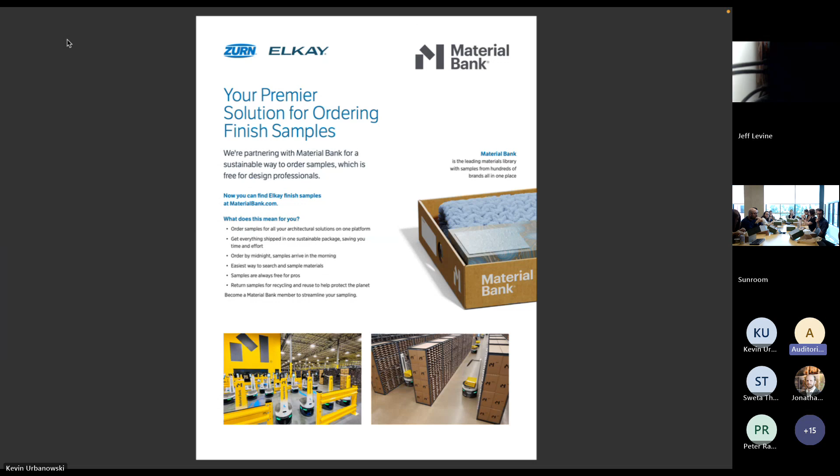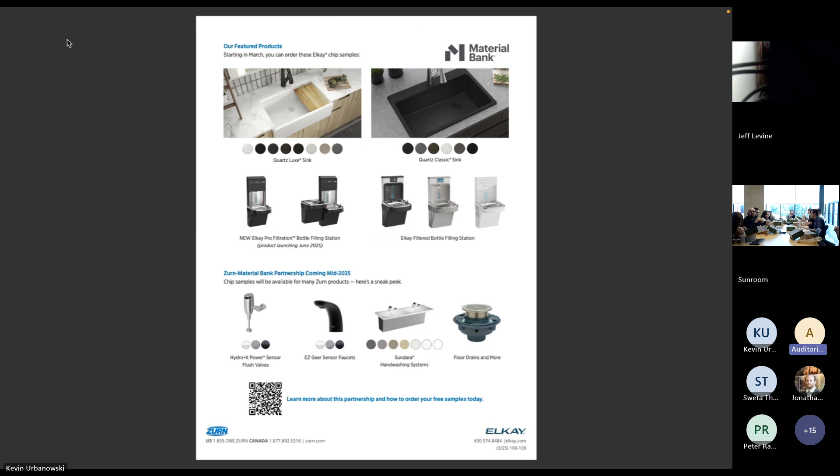And then the other thing, as far as housekeeping stuff goes, Material Bank. We partner with Material Bank on the Zurn Elkay side for samples. Are you guys using Material Bank at all? Familiar with it at all? Okay, so some yeses and some no's. Yeah, so they handle all our samples right now. So you could just log on their website, and if you guys need samples for anything, just pick your sample, and they can actually get it to you overnight. So yeah, it's a good resource to utilize. And then when you're done with the samples, you don't have to keep them around taking up space. You just send them back, and it's all free of charge for you guys to use the service. So again, I'll send all this in a follow up.

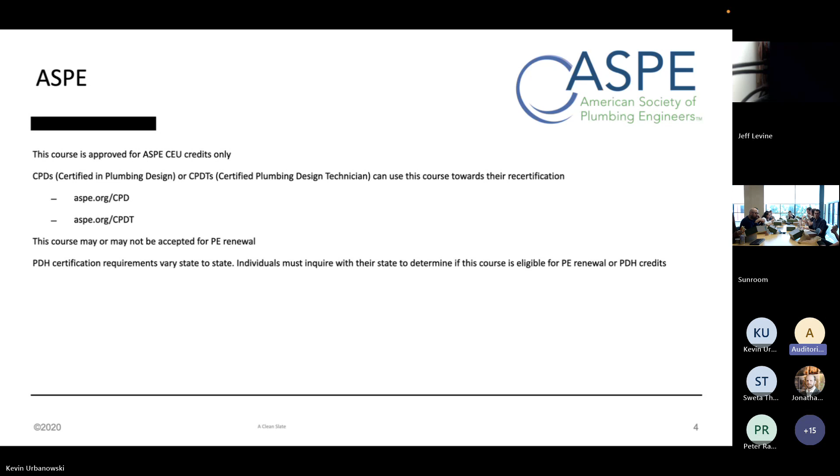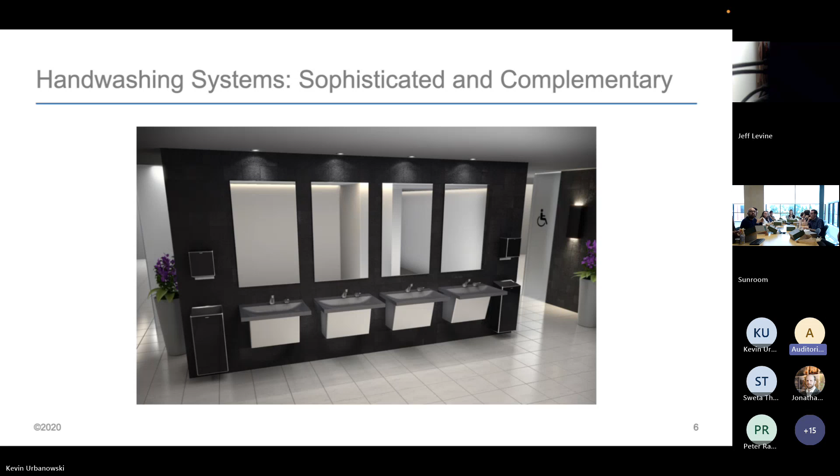So really this presentation is going to focus on what we've seen in the market as far as public restroom design, what kind of products we're seeing more widely used and spec'd. We'll go into how these products have changed over time and things like that. First being hand washing systems. A lot of manufacturers are focusing on these all-in-ones. Basically, you pick your basin style. Generally, they'll have like 6 to 7 different ones to choose from. You'll pick your faucet and your soap dispenser, and it's kind of like an all-in-one for you guys. Very easy to spec, and very easy for the contractor to install as well. So that's what we're seeing the industry going for in certain applications.

So we'll talk about the hand washing systems a little bit. We did a big study in Zurn Elkay, and a couple of things that we found is people really prefer their own space in the restroom. 30-inch sinks are kind of the standard now as far as the minimum goes. And then an alarming result. I really don't like to say this stat when people are eating lunch, but generally what we found during the study is only around 30% of men wash their hands after using the restroom, and 60% of women. So women are much better, but I think we all have some work to do.

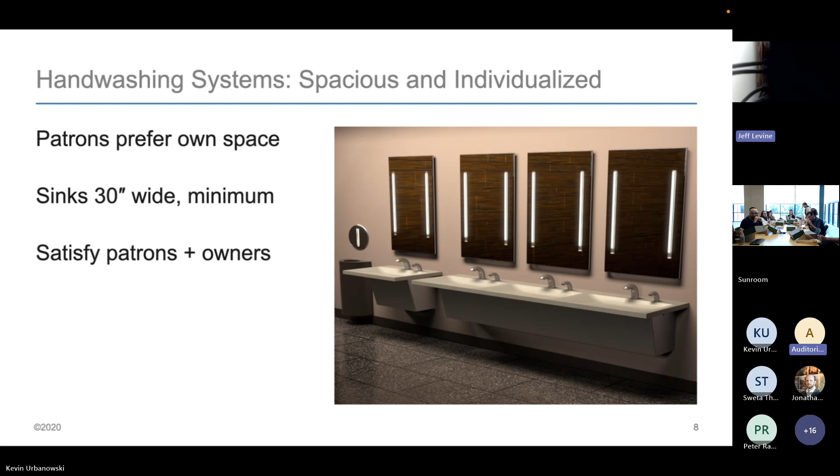They also did a follow-up: what would increase that score? And believe it or not, the nicer the restroom looked and the more sanitary the hand washing area was, the more apt people were to wash their hands. I know it's mind blowing, right? That something looks nice, we'll use it to wash our hands. But that was the takeaway from that. So thus, manufacturers started focusing on the aesthetic of the commercial side more so.

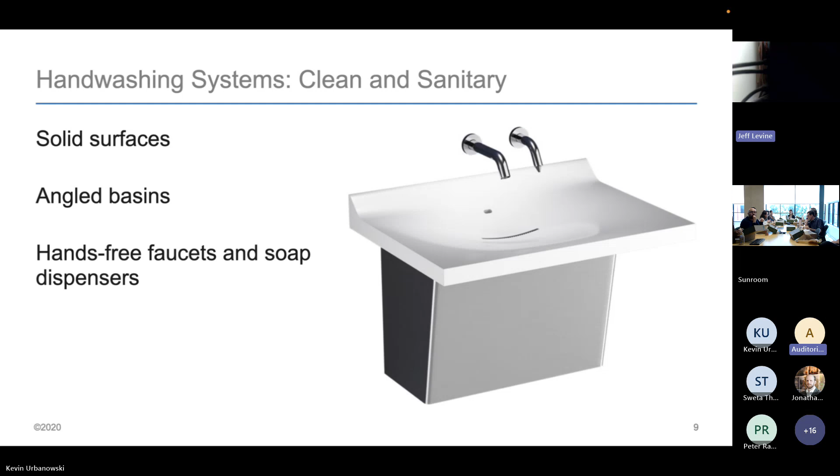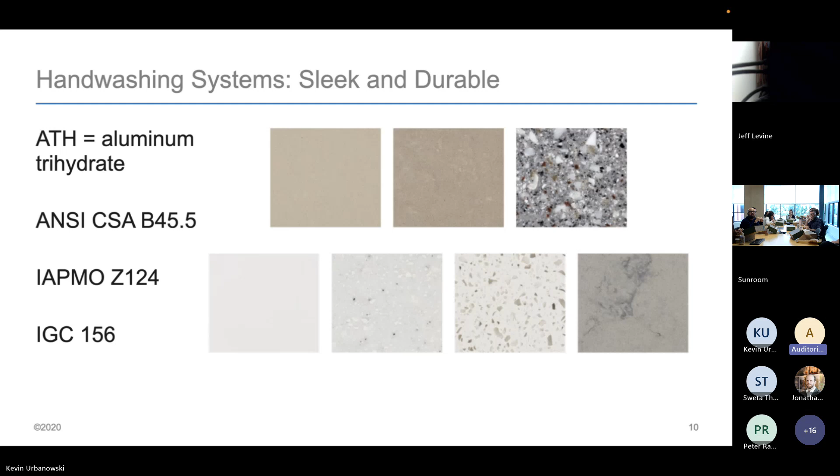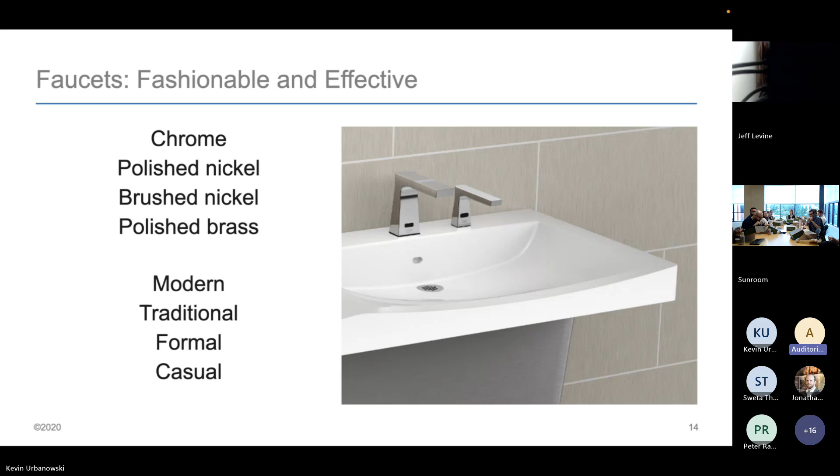So the other part to this is the faucets and soap dispensers. For a long time, we heard from the design community, we love the commercial products, but one, they're ugly, and two, you guys don't give us much of a finish other than chrome. So we focused really on offering more finishes and different styles as well. We're starting to see an increase in our finished plumbing, faucets and soap dispensers. One thing I like to mention is all of our faucets have matching soap dispensers as far as style and finish go. So again, making it easier for you guys to spec.

And then the automatic stuff's a lot more efficient when it does work, right? That's been a big focus for us as well. We're on, believe it or not, our 6th or 7th generation of sensor within the products. A lot of different things affect the operation of those sensors: the angle of the basin, how much lighting's in the restroom, the angle of the lighting, the material of the sink basin, if someone has a watch on or not, sometimes the material of the shirt, if they can interfere with that.

So there were a lot of unknowns, and that's why I'm sure we've all had the experience in the restroom, right? We go to stick our hand in front of the soap and nothing, right? Game of chicken. And then when you pull it away, it ends up working. They've always been field adjustable, but they had to go up underneath the unit, find the dip switches and adjust the strength that way.

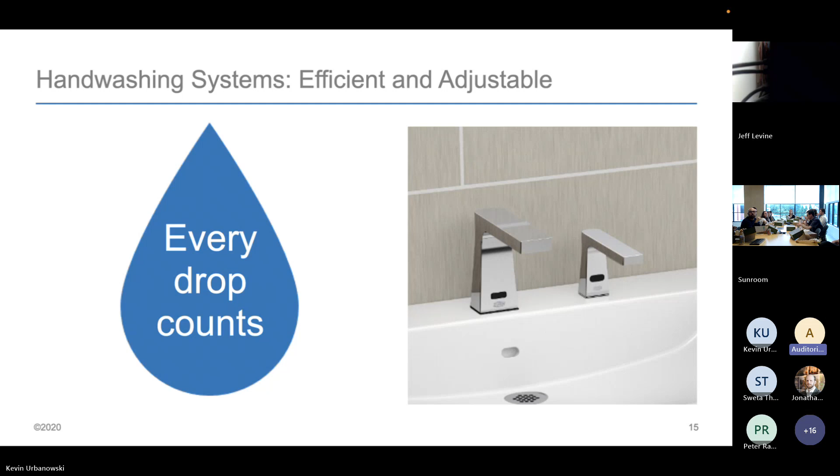But now the contractor is able to connect to the faucet or soap dispenser via Bluetooth. So it's just an app now, and they just go up to it, they get within the vicinity and it connects, and then they can adjust the strength and really take care of most of the process in the field pretty quickly. Different types of flows.

Yeah, so next we'll go to power sources. When you guys do spec automatic fixtures, what is generally your go-to power source? Usually our engineers. Yeah, okay, engineering. I think we're gonna let the GC figure it out, or the engineer provides the circuit, low voltage for it. Okay. So we'll go over some different power options so you guys are aware these exist.

You know, batteries are pretty typical nowadays. We hear a lot of batteries. Plug-in, and then a 10-year lithium. I'll explain more about that in a second. And then hardwiring. Just so you guys are aware, hardwire is going to be your most expensive product. You've got to get another trade involved. You've got to run all the circuits in the restroom, all that kind of stuff. Same thing with the plug-in, right? You've got to run all your plugs, things like that.

Battery, the downfall of that is generally it's about a 2-year life in a commercial setting. So they're constantly having to replace all these batteries in all these different fixtures, which, believe it or not, they have to have a recycling program. They have to keep the batteries in stock, order them. It's a pain point, right? So then you see your 10-year lithium, and that's really where we've been focused on letting the community know that these products exist.

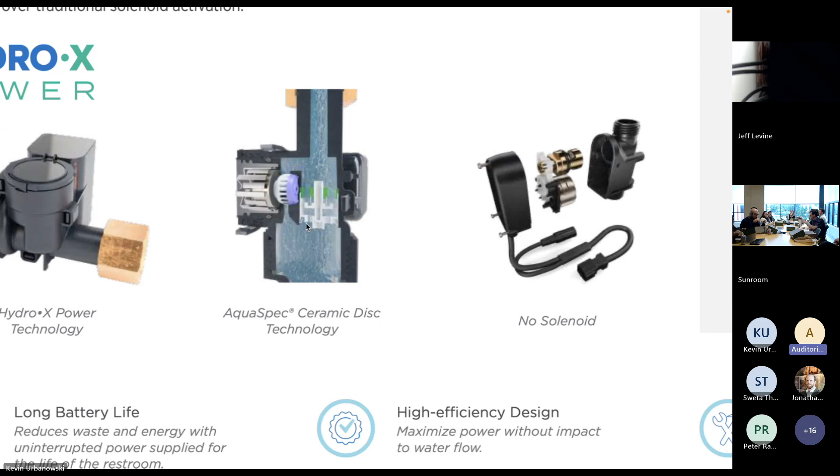So what we've done is we've actually put a little hydro generator into our faucets and flush valves now. You can see the unit on the left-hand side there. It'll spin this little water wheel every time the faucet operates. It'll keep those batteries charged. So you eliminate the battery headaches, and you eliminate the extra trade, more expense on the front end of the actual unit. And we're guaranteeing a 10-year battery life on all these fixtures. So it's a good happy medium.

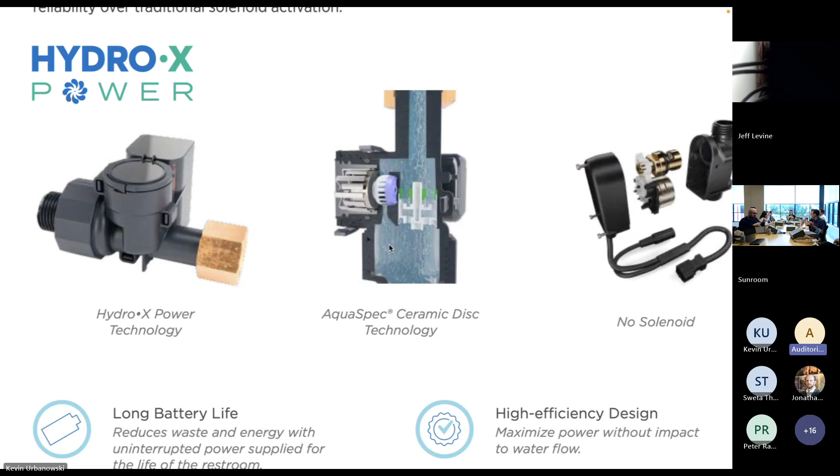And for any seasonal facilities, it's self-monitoring for the amount of charge that's left in the system. So it'll just automatically turn itself on if the charge in the battery gets too low. It'll just bring that up. Any facilities where water quality is an issue and maybe they're purging the line every so often, you can actually set self-purge cycles for these systems as well. So that's really cool technology.

The other pain point in faucets is how the faucet itself works. Most of them work with what's called a solenoid. It's a little plunger that just moves in and out of the waterway to allow water to either flow or stop. The problem with faucets and flush valves is the water minerals build up on the tips of those solenoids. Over time, that's what causes your faucet to leak, because the solenoid can't close all the way, and that water just drips through as the faucet's not being used.

So what we came up with is a brass cartridge here. And in the middle of that brass cartridge, there are 2 ceramic discs. That's the only thing that water actually touches in the whole unit when it flows through the faucet. And the beauty of ceramic is it's harder than any mineral deposits in your water. So every time the faucet operates, these 2 ceramic discs rub against each other and self-clean any minerals that do build up when that water flows through.

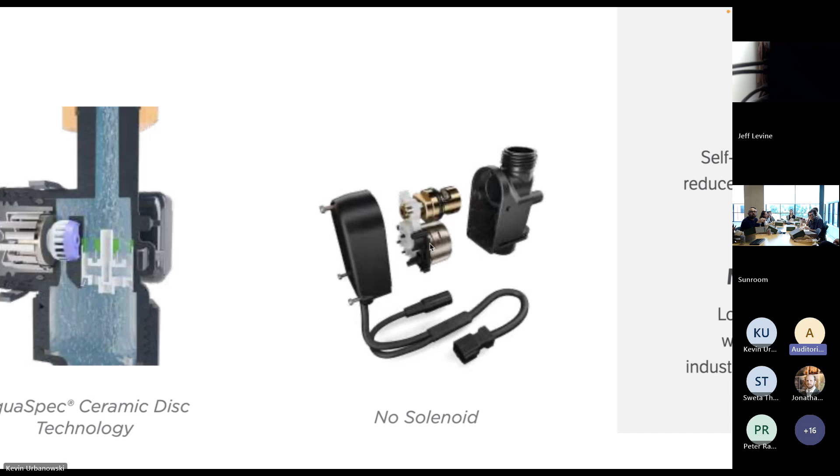So again, what we focus on is sustainability as far as batteries go, and then total cost of ownership for your building owners, right? If they're not having to replace solenoids or batteries, that's a cost reduction in both products and labor to them over the lifespan of the faucet or flush valve. So, yeah.

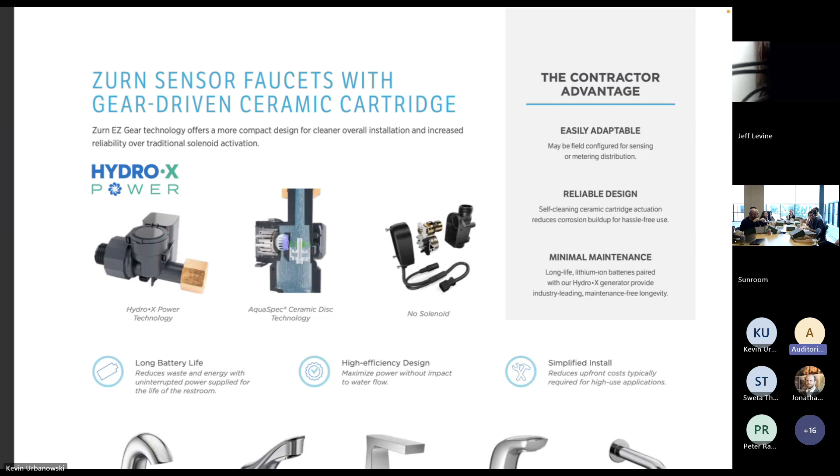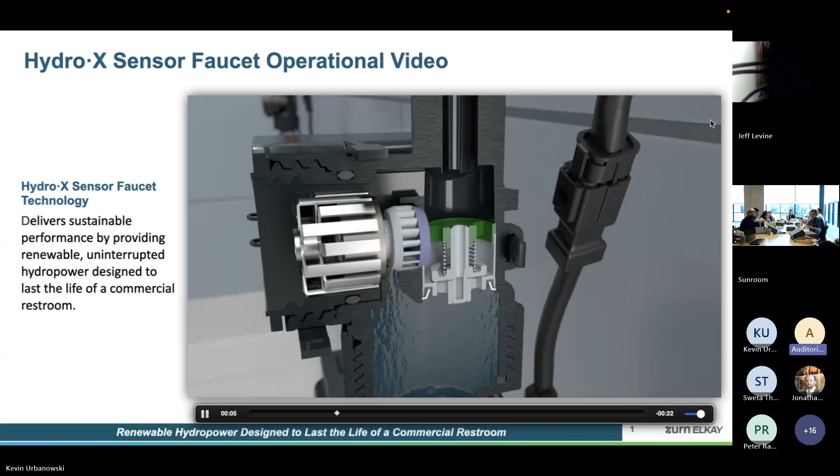The AquaSpec ceramic, the hydropower basically. Where's that device? Oh, that's going to be our next slide here. It's upstream of the faucet, right? So it's actually in the, you'll see it here, but it's in the supply side. So your water will come in from your supply, and then it sits right underneath.

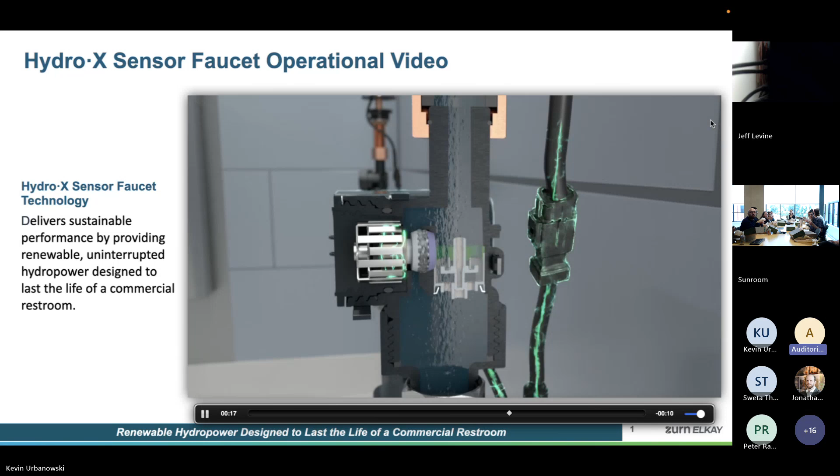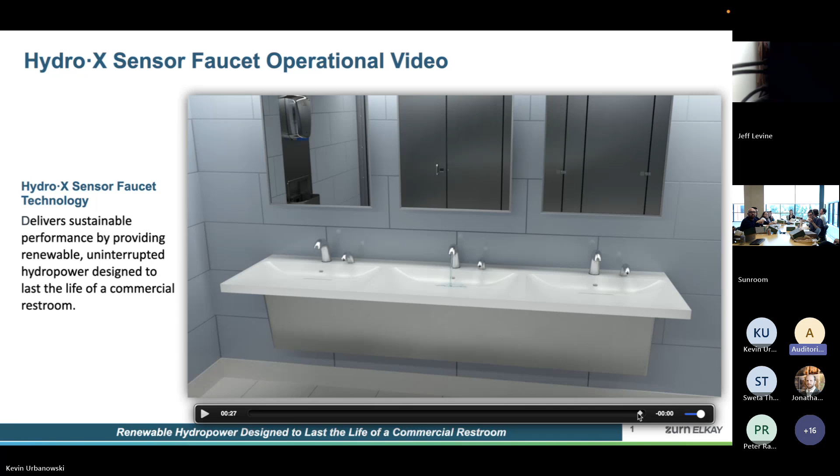And then if you have faucets right now that are automatic, most of them you could actually add a hydro unit to, because of the way it was designed and developed. And then that'll take up some real estate; as designers, what do we have to account for in the back of that space, right? Yeah, it's a pretty typical amount of space, just like anything else would be underneath there. There's really nothing too much extra.

So if you would eliminate the hydro, which is in the middle there, pretty much on all the automatic fixtures, that's where the batteries are housed down there. So without that hydro, the battery unit would just sit in there. So it just takes up that space in between. There's one for each faucet, so they don't gang together at all.

And what we're working on right now is we've tested soap dispensers with this. Unfortunately, soap doesn't flow enough to produce enough power for that return. But we do produce extra power at the faucet. So what they're working on now is a separate plug for soap dispensers in the future, to just plug that soap dispenser into so you get an all-in-one.

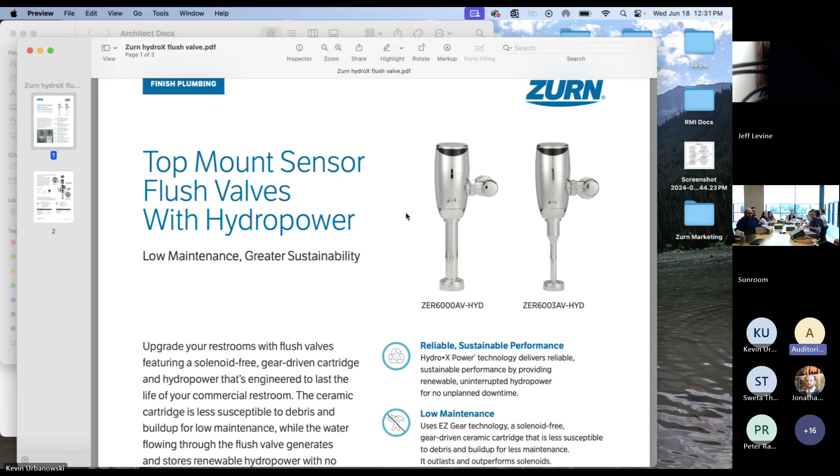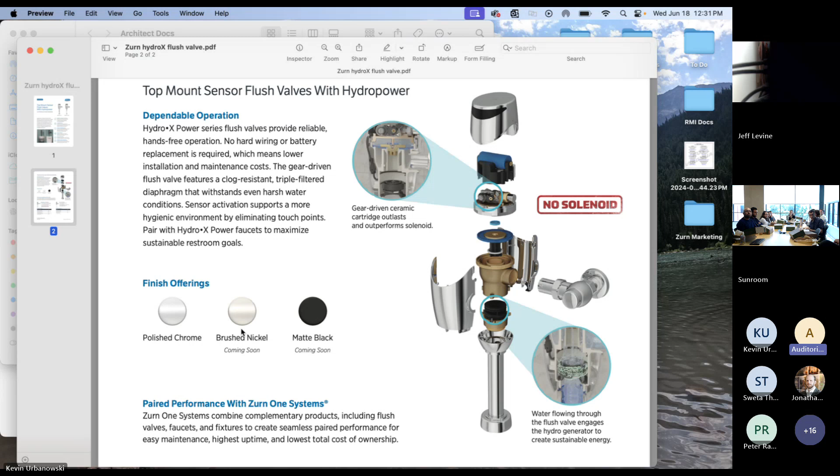So that technology has actually been around, we're going on 6 years with that now. And just as of last year, we redesigned, worked with outside design communities to redesign our flush valves. So they've got a new look. They've got 2 additional colors now as well, a brushed nickel and a matte black. And then we brought that same HydroX technology to the flush valves as well. So again, just not having to worry about maintaining too much in your restroom as far as fixtures.

So, on power or anything? We good? All right.

And again, we chose to go the hydropower route. There's other companies that do offer solar power, so just be aware of that. The drawback to solar power is most efficient restrooms now will turn the lights off when they're not used. So you've got that drawback, and then those solar cells have a lot less life than a hydro would. We're hearing from the field about every 4-ish years they're having to replace those solar cells. So just keep that in mind.

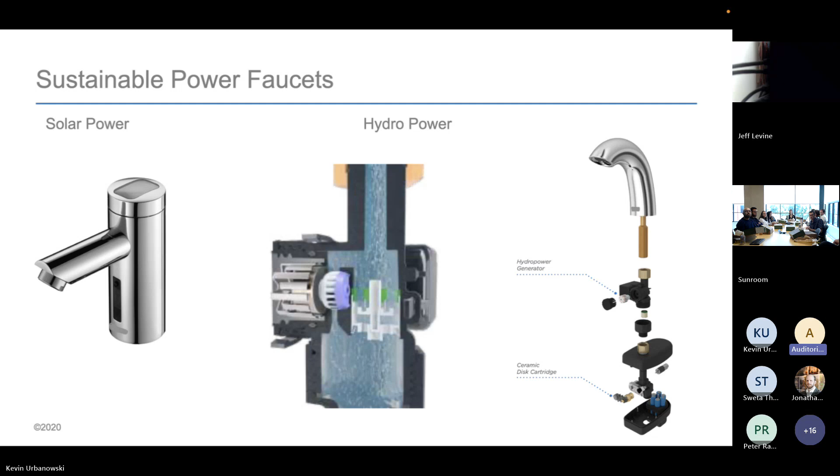So the other side to this is connected products. Is everybody familiar with products that talk to a building management system or anything like that? I won't spend too much time, but just know that the connected products will talk to a building management system and/or we have our own connected system. And if you're working on a LEED project, you can monitor the gallons of water you use for auditing purposes.

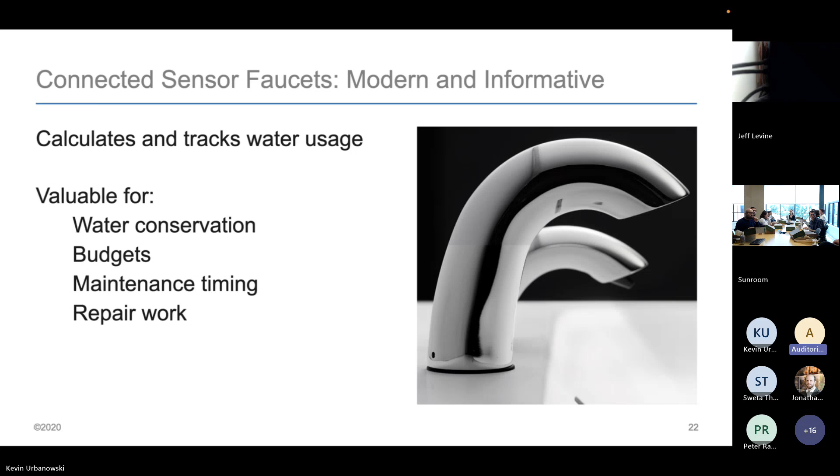And from a maintenance standpoint, every product will be able to give the maintenance staff a little bit different analytics, time of day usage, so they can schedule their cleanings. For instance, anything that has a filter on it would alert that the filter needs to be changed. Faucets, if they are battery operated, will alert them that the battery is low and needs to be changed, things like that. So there's definitely some value to that.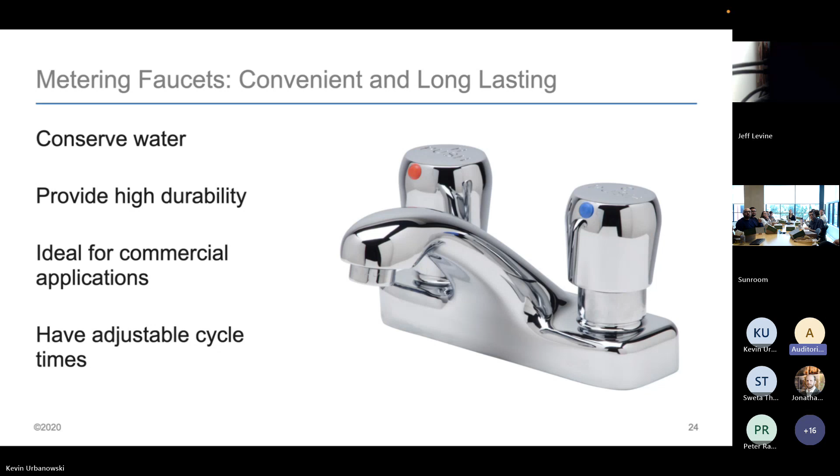Does everybody remember these in middle school and high school? Meters. Still have them. They're still specced today. Hand dryers. Are we specking hand dryers? Yeah.

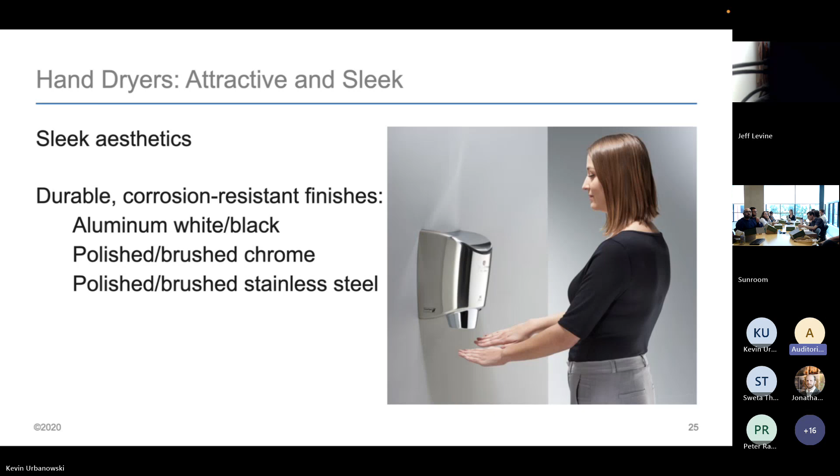I guess the biggest takeaway from hand dryers: they have them in all kinds of different finishes. But yeah, we just always highly recommend specking them with the HEPA filter. The restroom is generally where people go if they're not feeling well, and it's a smaller confined space. So hand dryers suck in air at a rapid rate, and then they blow whatever air is in the restroom down on your clean hands, right? And without a HEPA filter, we see a significant amount of bacteria on the hands after using a hand dryer. So just something to be aware of.

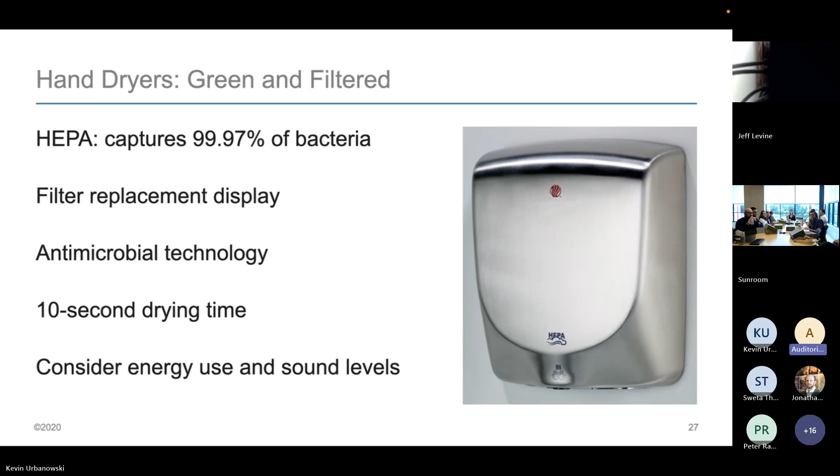Of course, different styles there. Are you guys specking any water closets? You guys get anything? Water closet? What's up? Our consultant does. Any LEED projects, like a Gold LEED project, where you do go to a 1.1 system versus the 1.28? Yeah, we have those here. The 1.1s? Yeah, in this building, I think we have 1.1s. Yeah, so just something to be aware of, if you guys ever do get to design or work with engineers that are specing a 1.1 system.

We've done a significant amount of research in our lab in Cary, North Carolina. Basically, it was two guys' job for 2 years to take every manufacturer's carrier, flush valve, and bowl and put them together, and then measure the line carry and how much waste it would evacuate out of the bowl, and measure the distance of that. You can imagine for 2 years straight how fun that was for those guys. But what they found is, going from a 1.28, which is pretty standard in every system that's widely used here in the U.S., down to a 1.1, there was a significant difference in performance and line carry for the waste.

So if you do start to work on a 1.1 system, try and select a manufacturer that has engineered all their components to work as a unit. With a 1.28, you can kind of get away with mixing and matching different components and still achieve a line carry that's acceptable, where you probably won't see plugs in the line. But then you go down to the 1.1 system, and with only that slight reduction of water, what we started noticing on our technical side is a lot more phone calls. And the first question we'd ask is, hey, do you have a 1.1? And if the answer is yes, we have a tree of how to treat that issue, right?

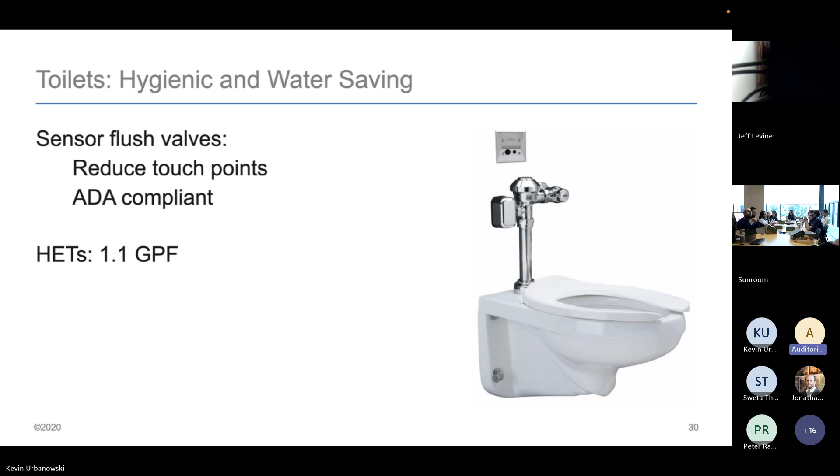All right. And then the other thing to think about too: a lot of manufacturers, on their flush valves, if they're automatic, they'll have a little override button, so to speak. Just make sure that you spec one with a true manual override. A lot of the sensors are actually just touch sensors. So if the unit were to run out of batteries or power for any reason, you wouldn't be able to flush the toilet on some manufacturers' automatic flush valves. Ours are all true manual override, as of about 4 years ago. We made the switch. So just something to keep in mind.

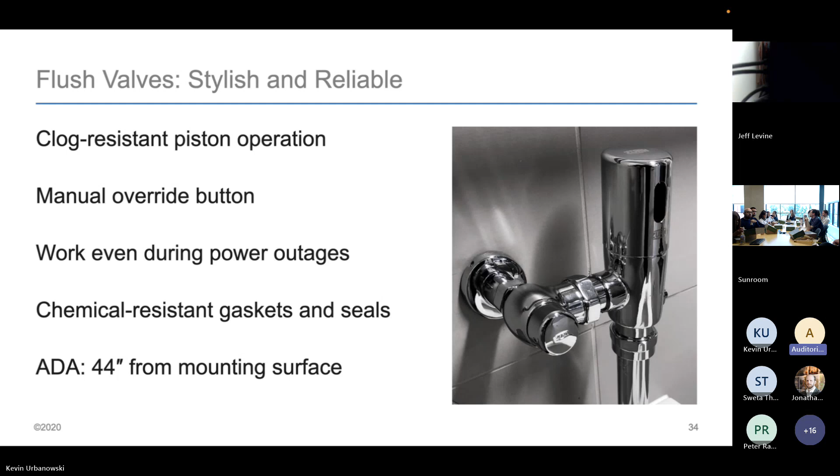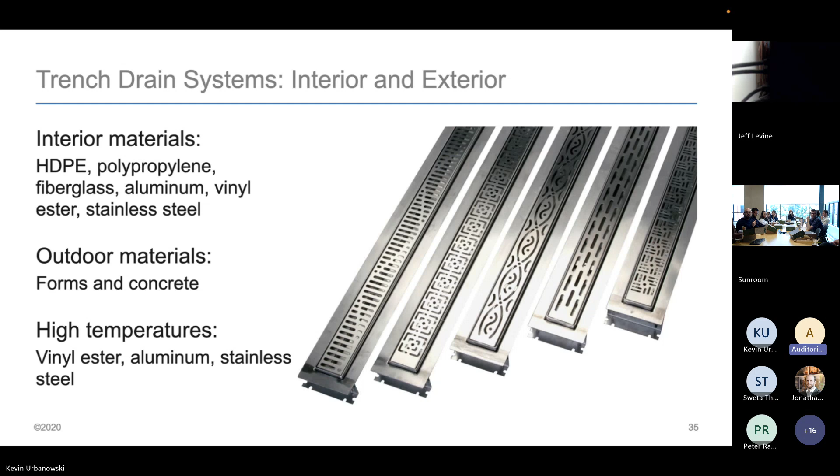Trench drains, are you guys specking any trench? So we have a full trench drain portfolio. Depending on what your application is, I'm sure it's probably just standard room temperature water, maybe from a shower or something as well. But for anything over 140, for sure, we recommend going to stainless.

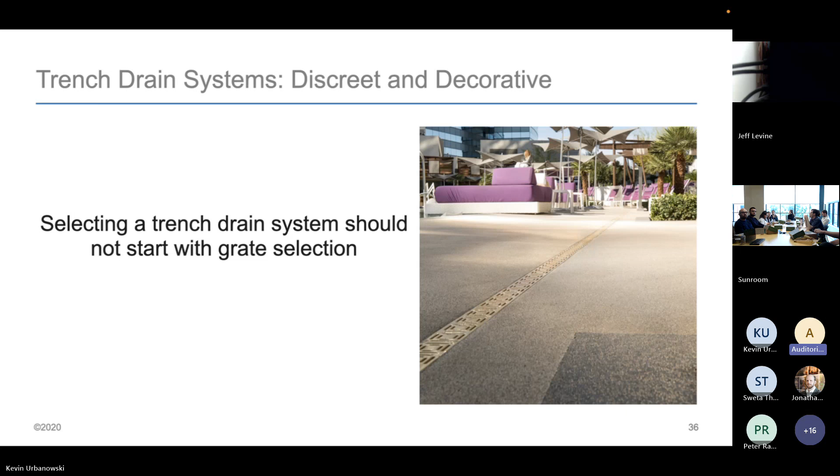And then grate selection is also important, not only looking nice, but thinking about the actual application and everything involved. We see so many times that a light duty grate will get spec'd for a hotel application, because that's rated for pedestrian traffic, right? But the luggage also rolls over that. And what we're seeing is heel rated, really. Yeah, heel rated as well. Yeah, heel proof, we see that so much.

And then have you guys seen any of the elevator threshold drains at all in this area? So it started in San Francisco, and it kind of made its way over to New York last year. Any 5-story building or above, they have to have elevator threshold drains in front of every elevator on every floor, just in the situation where that sprinkler system goes off, they can catch all of that water on every floor

because they want to reduce the risk. Even though you're not supposed to use an elevator when there's a fire situation, if people do have to use it, they want to reduce the risk of any water getting down in the elevator shaft, possibly flowing out of that elevator. So they're requiring it from any buildings 5 stories and above, as of last year. I think we have the requirement to provide the threshold, and we've been asked for the threshold for one type of the elevator.

I have never seen like a trench. Yeah. It seems overkill. Yeah, so it's not really a trench. It's a shallower drain. We specifically designed it for that, so it can handle up to 100 gallons a minute of water, and it's really not that deep, 3 inches or so. We have this on hand in house. We need to watch out for this in high rise applications. Yeah. So maybe changing code things too that we need to hit.

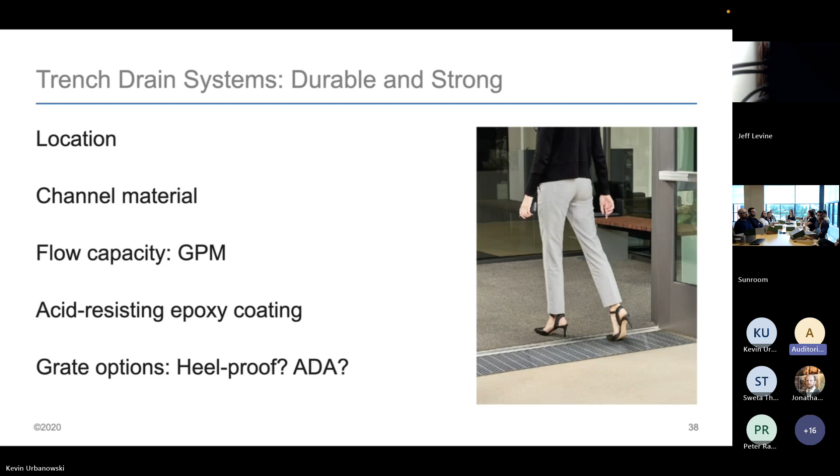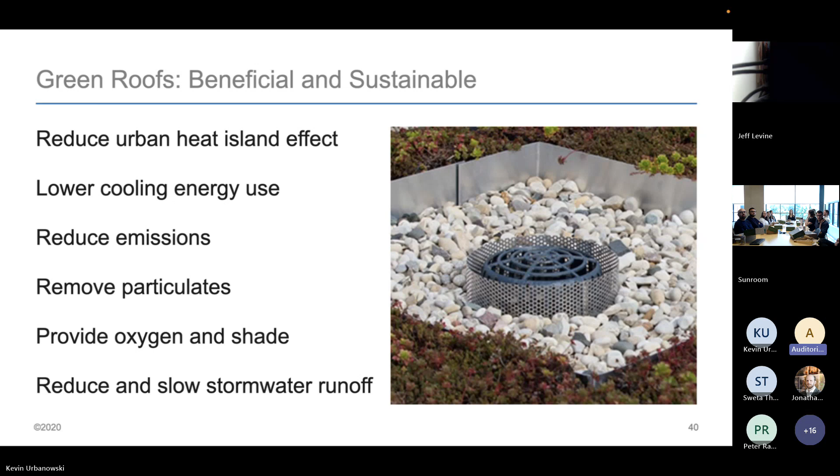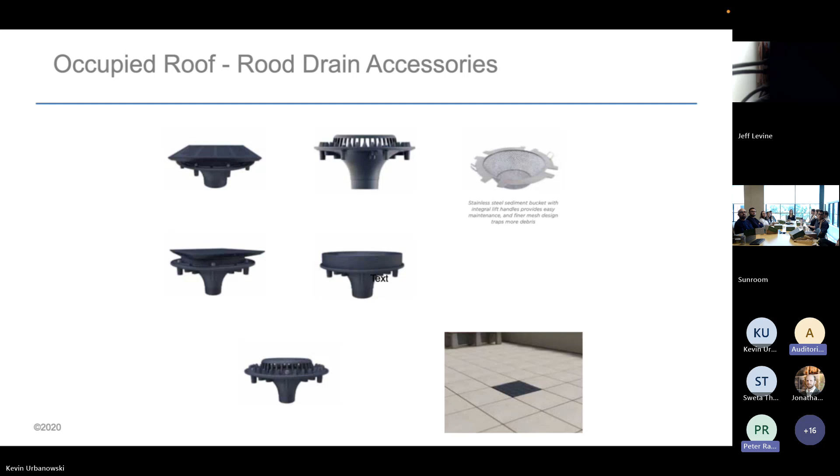You guys get anybody that wants custom drain covers? We can do them. How about green roofs? Any green roofs? Yeah. So we've got fully accessorized drain options for that kind of stuff. These paver slot drains have been popular over the past couple of years. We could also introduce these low-profile domes, just in case that buildup interferes with the standard dome. You could spec that low-profile dome. And of course, we've got all kinds of different strainers and things like that as well.

Downspout nozzles. Of course, we have our standard there. Everybody's probably familiar with that. But we've got a new family. It's powder coated aluminum, so it's not raw metal like the one you're typically used to. Generally on those, you'll see the building staining underneath them from the water running through. On the powder coated aluminum, that doesn't happen because it's powder coated and it doesn't bleach any of the metal out of the downspout. They come standard in those 5 colors, but we can also customize them to any color that you guys could think of.

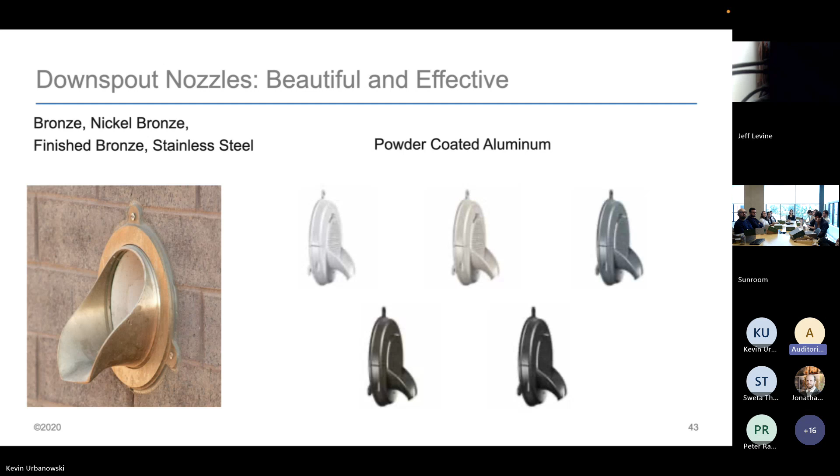And then they also come standard with the rodent traps on them too. So kind of like an all-in-one, just a little nicer for you guys. And then the tongue on these, standard is 4 inches. These are 2.5, so they're a little bit shallower of a tongue too. And that's it for that part. Any questions so far? Cool.

Steve's here. So we'll talk about some water coolers now. Are you guys specing water coolers, bottle fillers, things like that? All right, cool. So yeah, we'll talk about some new stuff from the Elkay side. So we've updated the graphics and come out with 2 new colors as of early this year on our enhanced series. So we've got a black and a white option for you guys.

Filters, these all ship standard now with a 6,000 gallon filter capacity. So that's about a 1-year use in a standard commercial facility, just making filter changes less frequent.

The other change we made to the unit is now they all have that quick change wrapper like you see on the left-hand side there. It used to be that they had to take this whole shroud off, really big pain, about 8 screws, and having it be on the ground and stuff. Now it's just 2 screws up top and it folds down like you see there.

And then all of our filters also have RFID chips in them for a couple of reasons. There were counterfeit filters going around the market about a year or 2 ago, causing issues for building maintenance people. And the other thing it does is it automatically resets the filter now, so they don't have to do anything special, and resets the bottle count or light and everything.

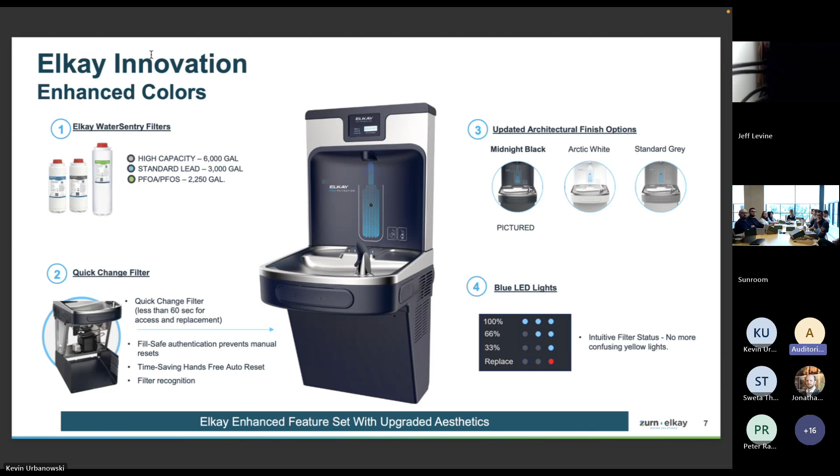We've got these in-home, nicer bottle filling units. They were designed for higher end homes, but we're finding them in nicer conference rooms. Just ran into an engineering firm yesterday that had one in their little kitchen. And they've got a remote chiller that can be placed anywhere within 20 feet of the unit, as well as filtration. Currently available in both white and black.

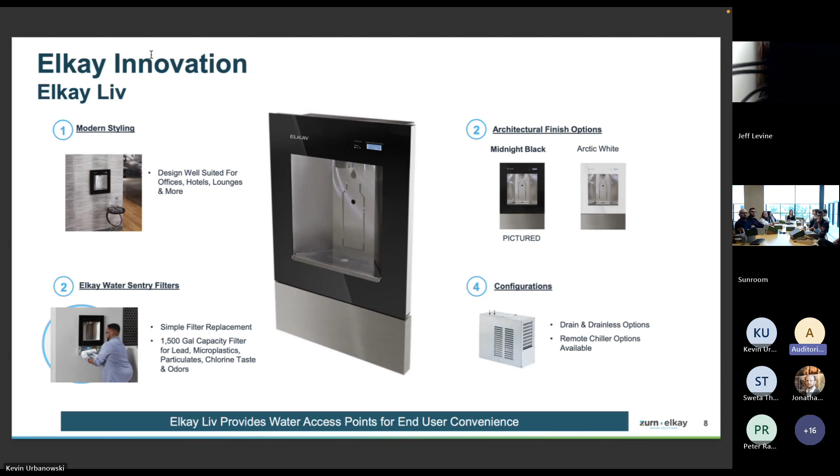Couple different looks. But yeah, we're seeing them in hotels now, hotel gyms, like I said, conference rooms, things like that. Vandal resistant, if you ever get anything vandal resistant, bottle fillers and fountains.

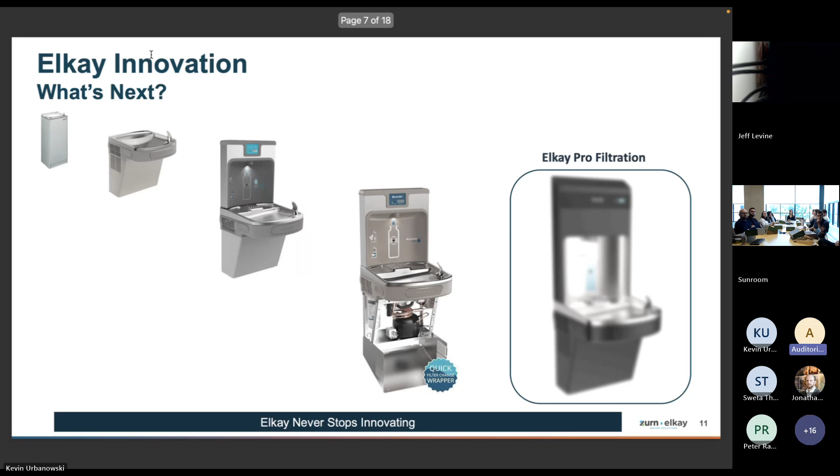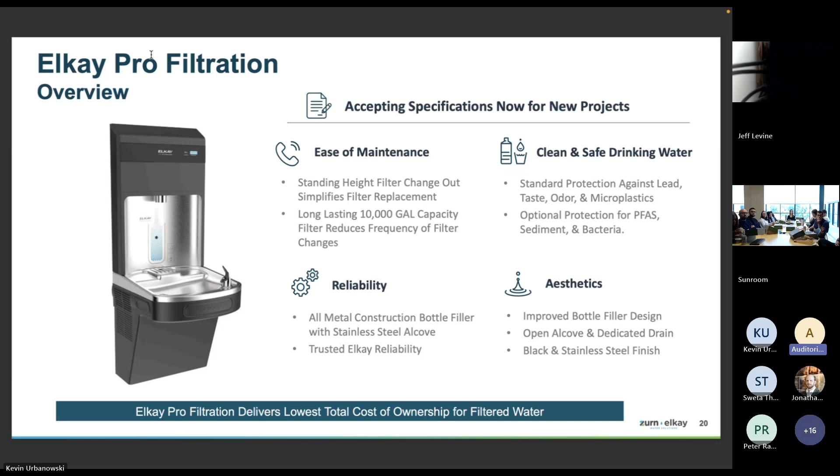We've also got a new unit coming out. It's going to be our addition to the family, called Pro Filtration. This is starting to ship in July. Fully stainless steel construction for the unit, just giving the aesthetic a little bit nicer look. And then we relocated the filters now to the top of the unit, just making it easier.

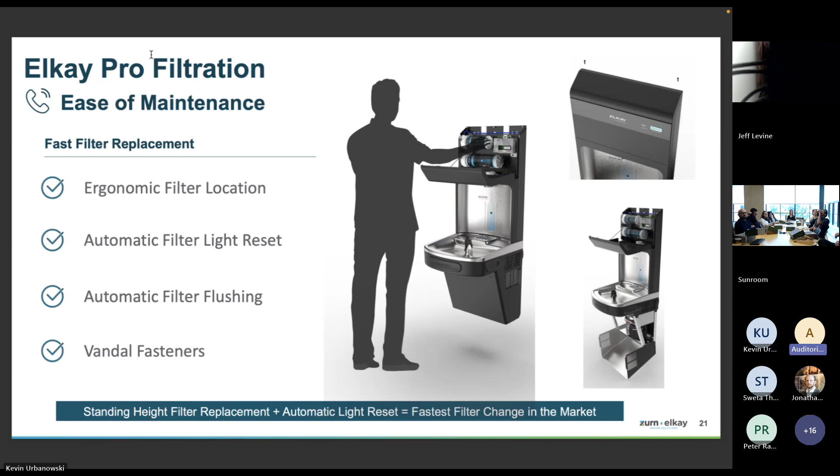Standard for the Pro Filtration is going to come in at 10,000 gallon capacity. And then if you add that pre-filter to the unit, it'll increase that by 6,000 gallons. So 16,000 gallon total capacity in this unit, and just a little bit easier to change. Of course, it gets the quick change wrapper underneath, things like that.

And then the other addition to this unit is we're going to have a UV disinfection light for the bottle filling water. So that'll kill any bacteria in the water. If Legionella is a concern or anything like that, it'll take care of that as well. So that's what we've got going on the Elkay side.

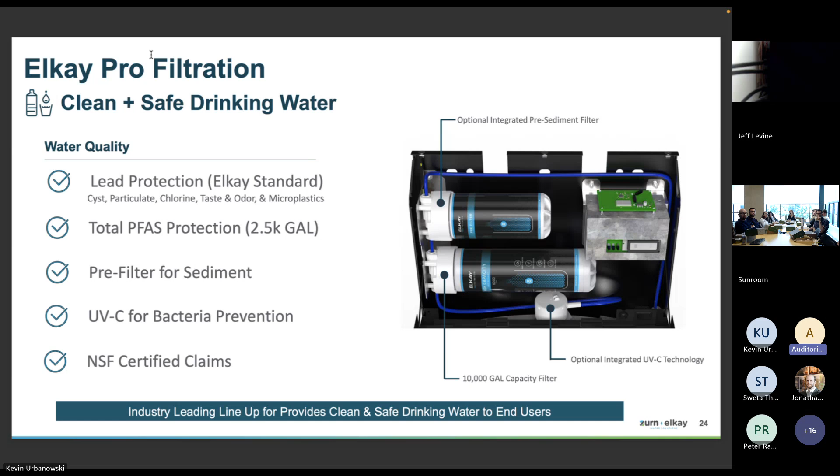Do you guys get any roof drain design at all? Does it affect your product or projects? Has anybody ever heard of or worked on a project with a siphonic system? So the siphonic works a little bit different from your gravity system. We're about 99% gravity in this country, and about 1% siphonic currently. Europe for the last 40 years has been the opposite. They do about 99% siphonic and about 1% gravity.

Siphonic systems operate in a different way. What they do is they actually create a vacuum within the system. And as soon as it goes siphonic, it'll actually start sucking the water off the roof. There's a couple benefits in doing that. Generally, you can use about half the size diameter pipe within the system. So if you're designing a 4 or 6 inch system, you can go down to a 2 or 3.

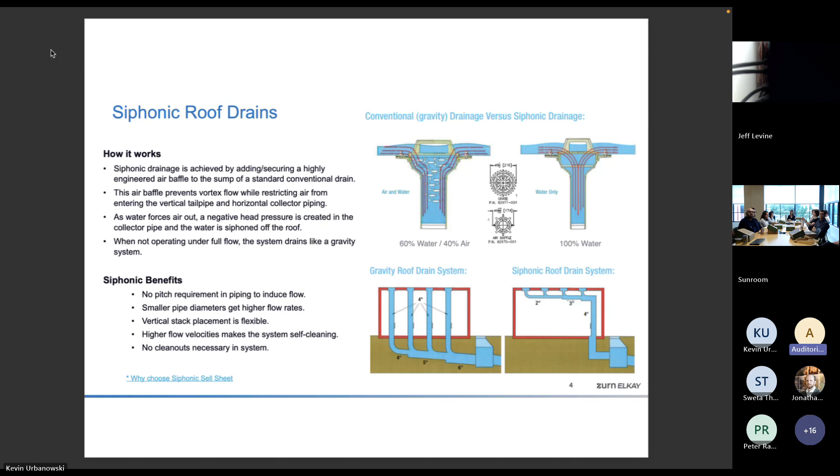Right. And just to let you guys know too, for your secondary system, they can do a hybrid approach. It doesn't have to be siphonic. It can be siphonic, but sometimes they'll do a hybrid approach as well. So yeah.

Any other product categories that you guys are interested in that you use often? Any other headaches or things that you think would be good to go over? I'm sorry, hose bibs? Hose bibs. We do have some in the family. What in particular were you thinking? Well, we'll sometimes have them up on a roof, and then you want to winterize it, so you're trying to put a valve with a drain up into the ceiling of the corridor below.

Yeah. Unfortunately, other than our website, I really don't have too much on that. It would take me a minute to find it all, but I can send you what we do have as a follow-up. We have a whole bunch of different ones, with freeze protection, things like that. So yeah, I'll send you some info on that.

You guys, are you specing anything like faucets, like any type of residential style faucets or anything? Well, the selections are made by the clients, our interior designers. Okay. They weigh in on the style and the finish, but in terms of specifying the particular fixture, it's really in the hands of engineers.

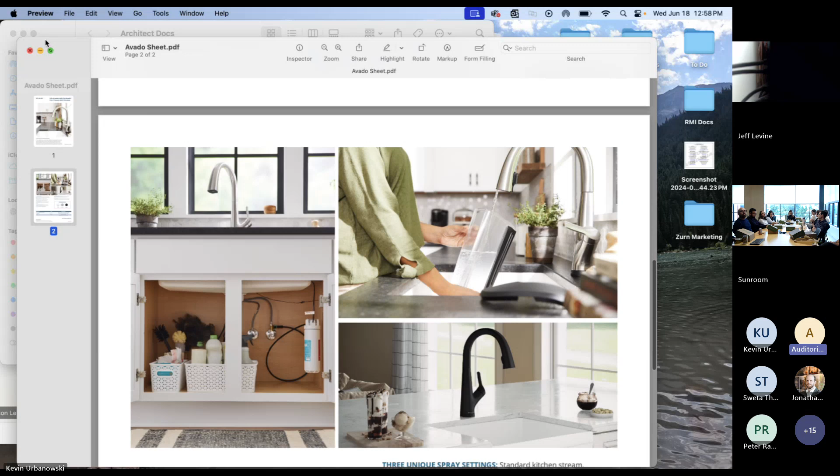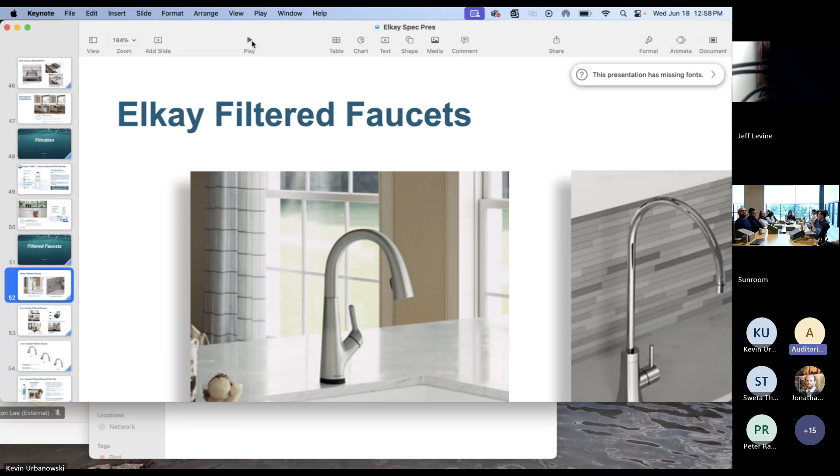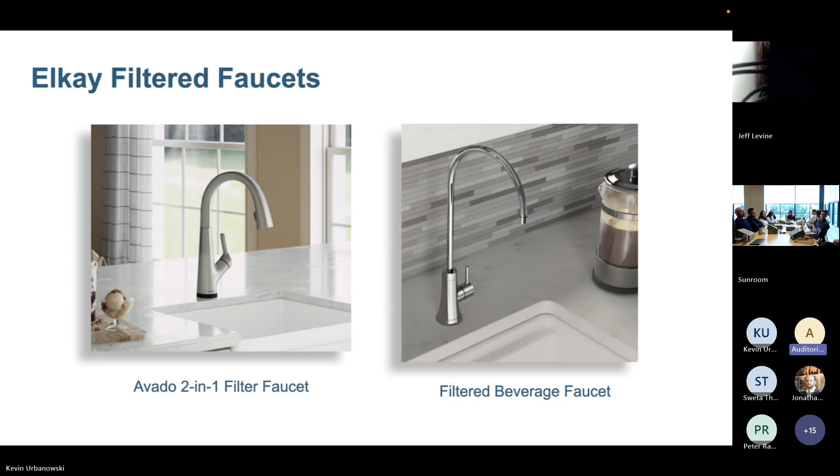We have these 2-in-1 faucets now, since we're so focused on filtration. So it actually just looks like a standard faucet, but it has a filtration piece to it. It still has your pull down nozzle, still operates like a normal faucet with the flow and then the spray there. But if the user pulls the handle forward, it'll actually dispense filtered water out of your faucet. So you don't have to have a separate beverage filler next to the faucet like we typically see. Everything can be done in just one place with this guy.

And just to give you guys a look, it used to ship with a standard filter, but now they all ship with a PFAS level filter. And that's what it would look like underneath the sink. Anytime you use that faucet and pull the handle forward, it would dispense filtered water. The life of the filter is about 7 gallons a day with a year's usage. Not too many people use about 7 gallons a day, so we typically say they're good for about a year before replacing them. And these particular ones are available in 3 different finishes as well.

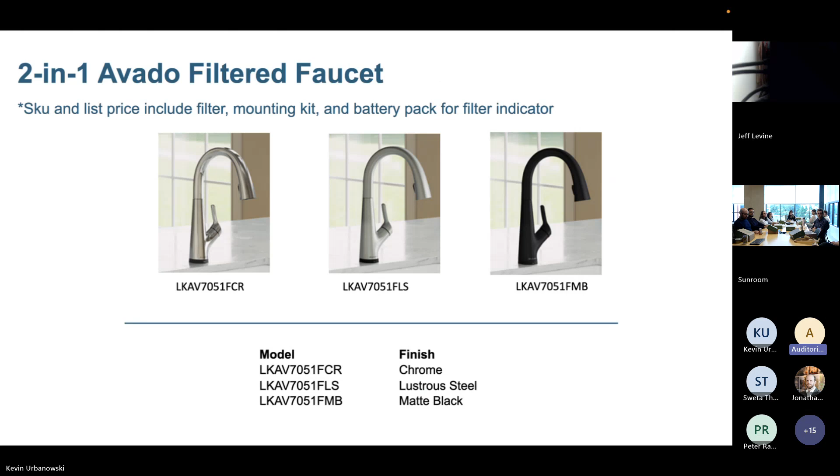What's the operation feel like? Like if I have tons of guests coming to my house and they start doing dishes out of the kindness of their hearts, and start to filter water instead of, oh, I need it to be hot, I need it to be cold. Is there a sensory thing that tells me I'm about to enter the filtered realm of use? Yes, so it only dispenses cold water from the filter portion, and it'll come out in that kind of stream here. I get it, but in the control, can you accidentally go filter is my question. No, you kind of see it right here in the bottom left-hand corner.

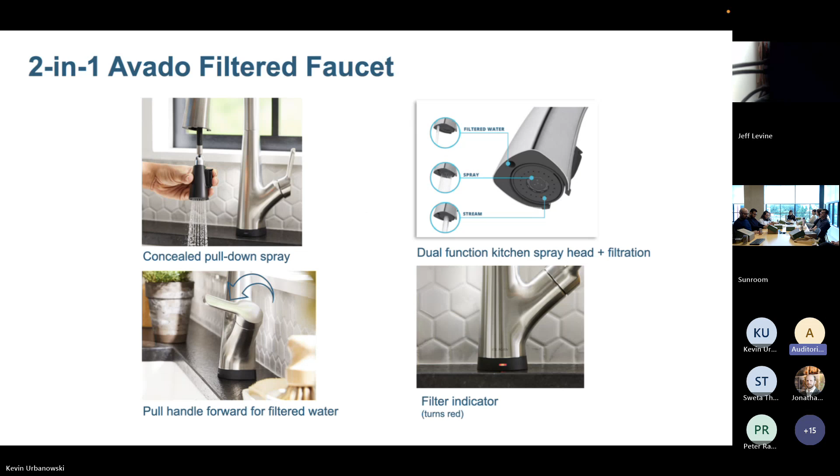When you use a normal faucet, it'll just open up like a normal faucet, and then you have to actually pull it forward. There's a little action that you'll feel to turn that filtered water on, versus when you open up the handle in a normal situation. So it'll just be different in that respect. I'm in the middle of getting samples, because that's my number one question, like, does it feel different? It does in a way, and it makes sense when you actually use it. There's also a little filter indicator on the bottom that will light up, telling you that you're using filtered water. Other than that, it'll operate like a normal faucet.

We also sell these filter kits if they're ever interested in just filtering. A lot of people like to attach them to their refrigerators, especially with the PFAS level now, so their filtered water in their refrigerator is PFAS free, and if it makes ice, it's also free of PFAS. Any other questions, guys?